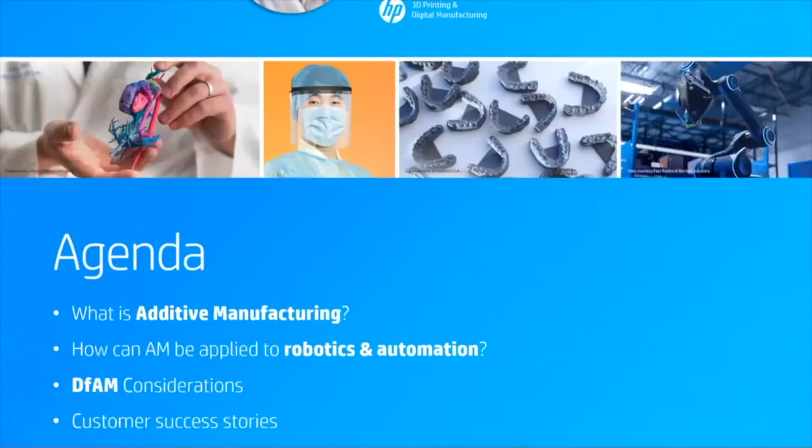We will start off with the introduction of additive manufacturing: how it is, what are its advantages, and finally, how can AM be applied to robotics and automation. Specifically, we will also dig deep into HP's technology solution.

Then we will make some considerations about designing for additive, and we will talk about what mistakes to avoid. At the end of the presentation, I will introduce you to some of our customer success stories, and I will actually show you some real-world applications from the demo room.

Also, make sure to submit to us any question, doubt, or curiosity that you might have. We will have a live Q&A session at the end of the presentation where I will try to be as exhaustive as possible. Let's start with today's manufacturing scenario.

When we talk about manufacturing, we can basically group various methods into three big families: subtractive manufacturing, in which material is subtracted or removed, like CNC machining; and formative manufacturing, where there are technologies such as injection molding or extrusion.

And finally, additive, which is a topic that we will dig into today. Basically what happens is the opposite of the first of these three categories. It involves adding material layer by layer.

Before starting, it is important to say upfront that additive manufacturing does not want to replace other technologies outright. What we need to do is think of additive as one of the tools in our toolbox that can actually be really powerful when used properly, working along with other manufacturing methods.

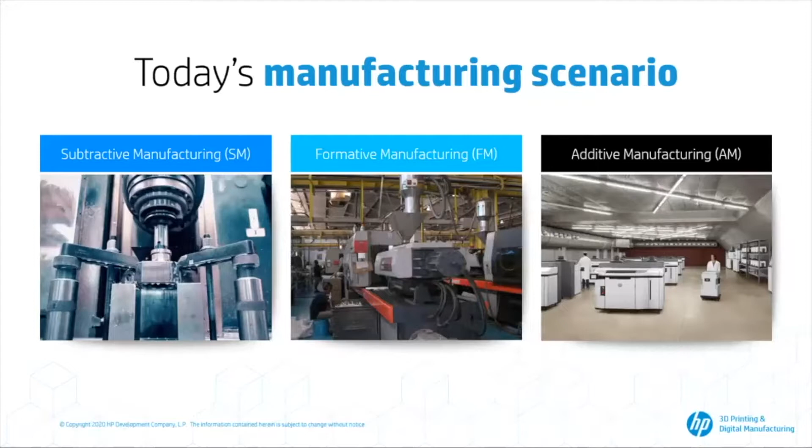So I am talking about different technologies, because if you choose the right process and pair it with the right material for your application, that's when you can actually start realizing some of these advantages.

For example, you can think of speeding up your design cycles compared to most traditional methods, at least, and accelerate both innovation and time to market with your products.

You can also reduce your physical inventory and instead develop a digital inventory, since you can print on demand. This also means that your supply chains will be more robust. Now you can either print directly in-house or rely on a local network of digital manufacturers.

We actually saw the power of this in full effect during the pandemic. Supply chains were struggling to keep up with really critical medical equipment. So we saw a lot of companies with printers stepping up and filling in those gaps, printing face shields, respirators, even nasal test swabs.

Finally, you'll be able to take more control over your capital expenditures, since you can be more strategic about when you actually need to go to a tool solution, like injection molding or CNC, versus simply leveraging additive manufacturing for bridge production or final production.

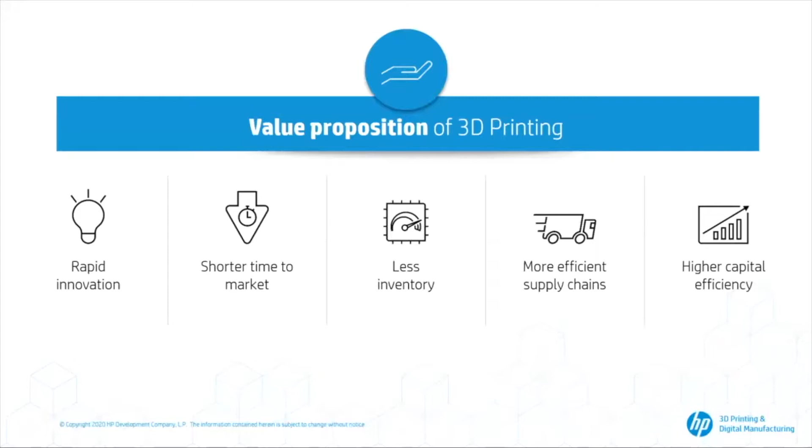As I mentioned before, I have been talking about choosing the right technology, and I actually want to reinforce that concept because it is extremely important to choose the best match between what 3D printing can offer and every company's needs. Obviously, from HP, we provide one specific solution.

So, for example, if you are mainly looking at just a few prototypes here and there that do not need that much quality finishing, or that have a kind of wide margin of error, then maybe a smaller machine like an FDM machine might work better for you.

But if you are looking at final parts or components that you will use consistently, if you need high quality and precision, maybe buying an FDM could actually slow you down when you compare yourself to other competitors in the field that are instead investing in different technologies like HP's Multi Jet Fusion.

But how does the spectrum reduce? Objectively, when you choose a technology, there are three main things to be taken into account.

Your product's capabilities. So for example, let's say that you need a very large part, like a large jigs and fixture or a large end-of-arm tooling. Not all technologies obviously have that capacity, and so the technology options reduce.

Same with very high dimensional accuracy. For example, for a very small needle bearing cage where the margin of error must be minimum, obviously not all technologies will be up to the task.

Again, materials come into play, as I mentioned before. The other two things to be taken into account here are material price, which is pretty self-intuitive, and also material nature. If you produce parts that need to go through specific regulation tests, or need to work in very high temperature environments, obviously not all technologies will match the material that you need and will work for you.

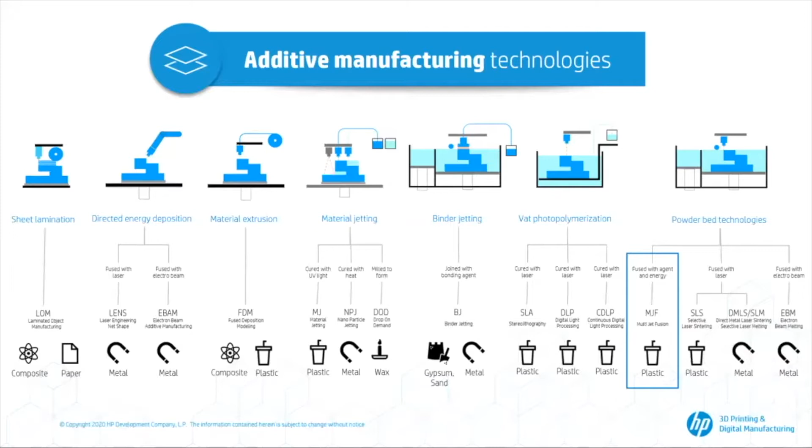Anyways, among powder bed technologies, HP's Multi Jet Fusion stands out. To make an actual comparison, not only with traditional methods like injection molding or CNC, but also with other 3D printing technologies on the market right now, let's have a look at this slide.

First of all, when compared to traditional manufacturing methods, additive manufacturing from HP 3D printing actually allows more customization. You can customize your components in a very economically viable way, with new and complex designs and flexibility, without the limitations of a mold. You can say yes to what you couldn't with traditional manufacturing methods, also thanks to all the software providers that there are.

And then costs and time savings. You can cut on the molds and tools that might be too expensive to produce, and the turnaround times are reduced as well, since any design change can be done in almost a click, and the new edited batch of parts can be good to go in days or weeks, instead of weeks or months that it would take for CNC or injection molding.

When talking about other 3D printing technologies on the market instead, HP stands out in terms of durability, for example. With MJF, you can have part strength both on the XY surface and also almost as strong in the Z axis, which enables a lot of design possibilities that will not compromise the strength of the part.

Talking about strength, parts are strong and can be tested in millions of cycles, and they are ready for production environments.

Sustainability, not only in terms of material waste, which is actually a feature of additive in general, but specifically HP's material portfolio has a 70 to 90% rate of material recyclability.

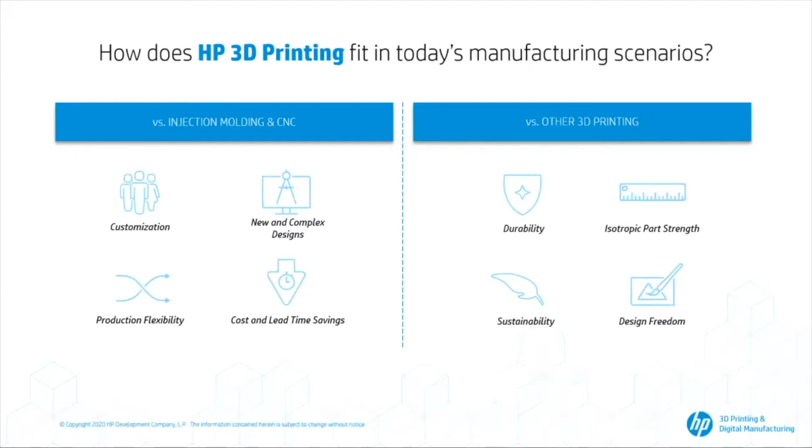To understand that better, let's have a look at this video.

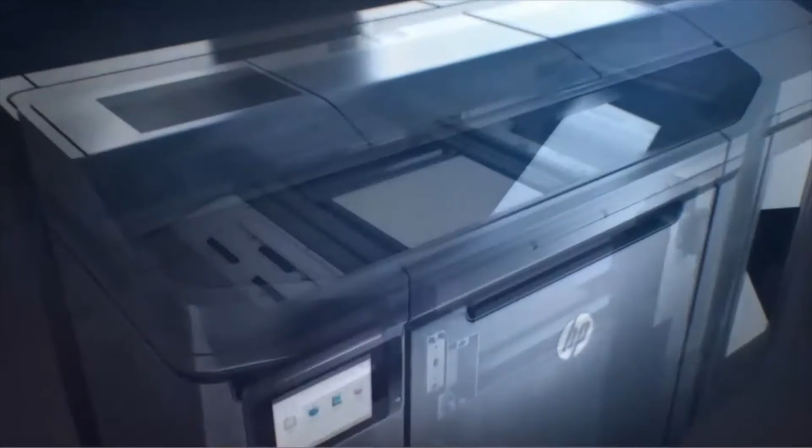So HP Multi Jet Fusion is a powder bed technology, as I already said, which means that what happens is that we spread thin layers of powdered material, and then some HP inkjet printheads apply liquid agents drop by drop across the bed. Then, when the temperature is raised up to the fusing temperature by infrared lamps that apply energy, only certain portions of the powder actually fuse to create the desired shape.

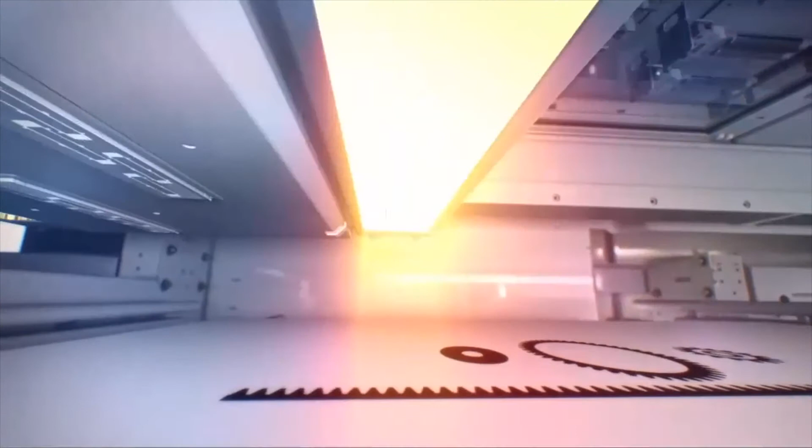And this whole time, sensors and thermal cameras monitor the temperatures to ensure that the process is operating as expected. And once a layer is complete, the platform lowers and the process repeats until the print job is complete.

So the key of this process is in the liquid agents: the fusing agent, which attracts the heat, and the detailing agent, that is water-based and instead deflects it, evaporating for the most part in the process. It's very similar to 2D printing because it also leverages the same inkjet technology.

Let's now move on to the next section of the presentation. How can additive manufacturing actually be applied to robotics and automation? Where is the advantage? Let's start by looking a little bit at the market.

What are the mega trends that are impacting robotics and automation right now? Over the last several years, we've been seeing a number of them across the robotics and automation industry. For example, a huge growth in robotics as more and more companies look to automate their processes and minimize simple, repetitive manual tasks.

All of this while also bridging labor gaps and reducing cost. With that growth, we're seeing more of a demand for not just the same old solutions, but safer solutions, more sustainable options, and also more flexibility in production lines: the ability to deal with higher variation, smaller batches, faster changeover times. If we stop and think about all of these trends, we see that they all go hand in hand with the benefits AM can provide when used efficiently.

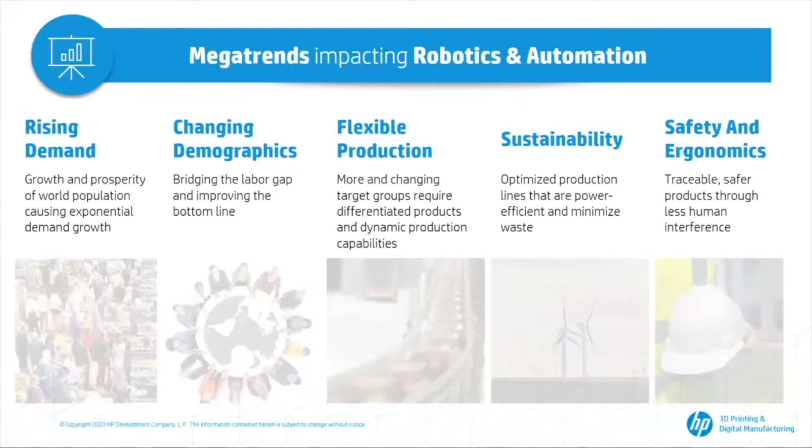So we can see that industry is catching on, and as a result, we are seeing rapid adoption of additive manufacturing for a wide range of industrial applications. For example, mechanical components such as electrical housings, bearing cages, gears, pulleys, jigs and fixtures, inserts, brackets, masks, etc., all of the air conditioning applications, then pipes, tubes, and fluid systems, which also includes pumps and valves, turbines, irrigation systems.

And finally, a topic that we are going to deep dive into today, which is end-of-arm toolings - end effectors, actuators, gripper adapters, sensor housings.

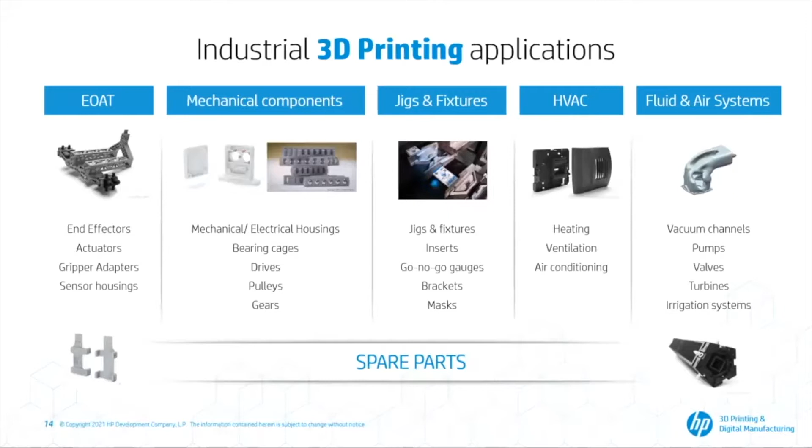When you first think about 3D printing, it is pretty common to think of prototyping, and that is actually a great place to start. But in reality, the technology has advanced to a point where we can now print very robust, reliable end-use parts. But how do you get started with additive, especially if it's the first time you approach the technology? It's very relevant to look into this question.

How do I start designing parts for additive manufacturing? The answer in part depends on where you are in your design cycle. The earlier on, the easier it will be to take full advantage of the technology, and the bigger the benefits in terms of parts performance, cost, and time to market.

As you can see in this graph, moving back on the timeline that goes from defining a new product to introducing it in the market and providing service and support around it, the opportunity for additive manufacturing is bigger going backwards. So let's analyze this, moving from the latest stage of the development cycle to the first, from end to start, and see what happens when introducing 3D printing in your facility.

So we are here at the manufacturing analysis stage. Let's keep in mind that even if you have a part design that's fairly set with little room for change, there are still potential benefits in terms of time, weight, and cost savings. For example, if we're moving from a machined part to a 3D printed part, one option is to lightweight parts. With subtractive technologies, often the goal is to reduce operations to minimize part cost, but that also leads to the heaviest part.

But with additive technologies, you want to minimize material used to both minimize cost and weight - they go hand in hand. Here are some ways you could approach that: hollowing the parts, creating honeycomb lattice structures, depending on the part and the structural integrity required, or you can try to optimize the topology of the part, finding the best distribution of material given an optimization goal and a set of constraints.

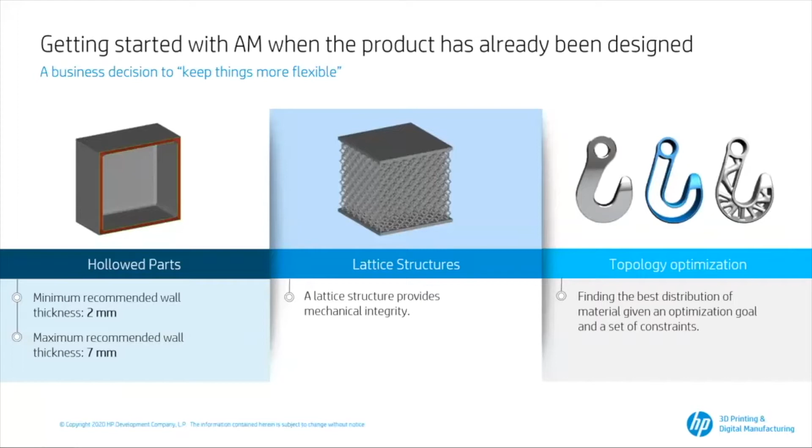Again, as I said before, this happens when you don't have a lot of wiggle room, or you don't have the experience to go through the process to ideate an intricate design that you could achieve from 3D printing. Let's look at an example, specifically an example of lightweighting.

These large format printers use several machined aluminum and steel components. We started investigating how to replace these components with 3D printed versions. What you can see here is the design progression for one of these components. What started as a machined block ended up as a topology optimized structure that obtained a 50% cost reduction, a 93% weight reduction, and not to mention the huge carbon footprint reduction in production.

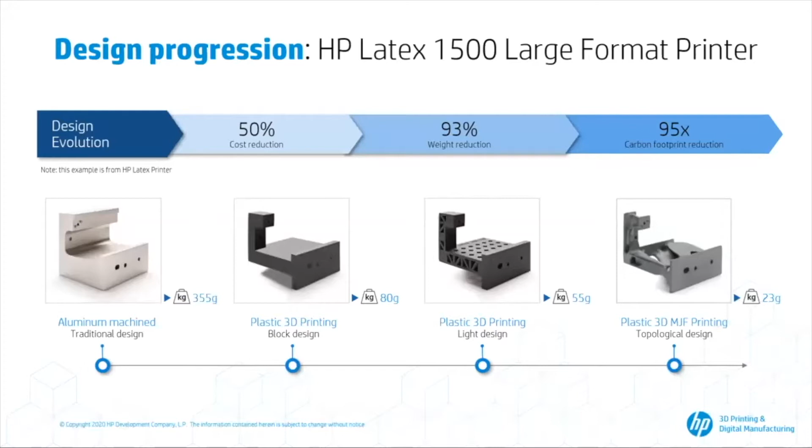But while this is all very impressive, I really want to point out that you don't have to go all the way to this final iteration to unlock most of those benefits. Even by taking just that first step with very minimal design changes, we realize a significant improvement. Even with very limited time or dedicated resources, you can achieve design improvements with additive.

Let's go back to our graph now. What happens if we start a bit earlier, when there's a little more flexibility in your design? Now you can start optimizing for the specific 3D printing process you've selected, and potentially consolidate multiple parts together in a more efficient form.

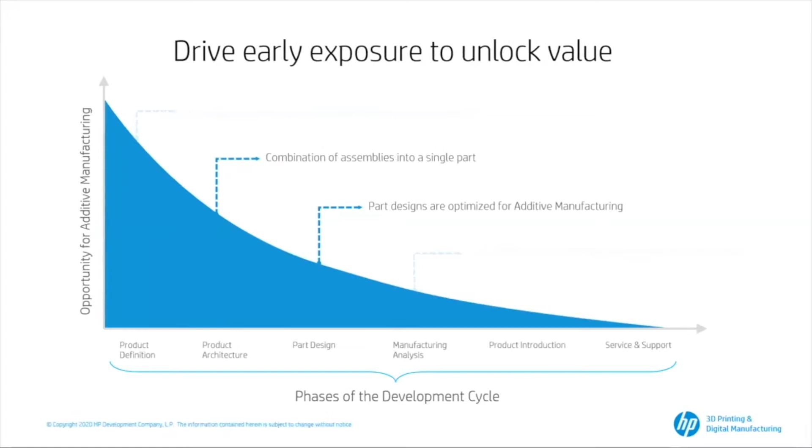Let's look at another example in terms of assembly consolidation. This is a drill extraction shoe used to remove silicone sludges and water used in our laser cutting process to make printhead nozzles. The original was made up of 8 parts, mostly machined. You can immediately see the benefit in consolidating this assembly into just one part. It's not just easier to assemble, but it also eliminates all these joints, reducing any risk of leakage - the number one thing you want to avoid when dealing with fluid systems that need to be air or fluid tight.

To give you some numbers, the cost reduction obtained with this product was 95% compared with the original part. The weight reduction was approximately 90%, both due to topology optimization and material reduction. There was also a lead time reduction, because CNC machining required 3 to 5 days of processing, while HP's Multi Jet Fusion completes the same task in 24 hours.

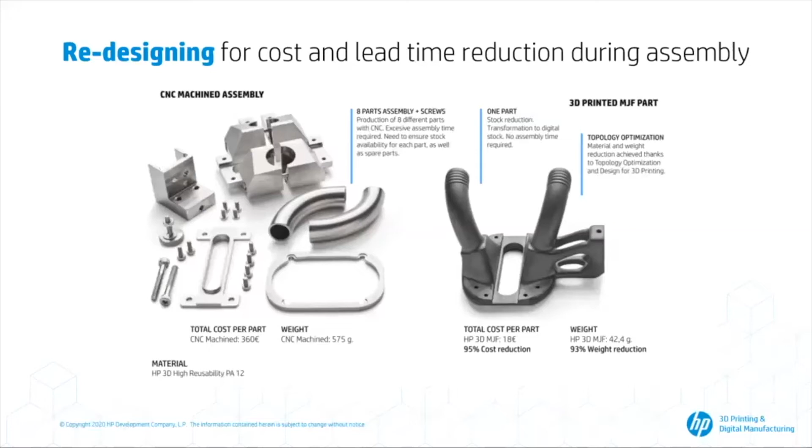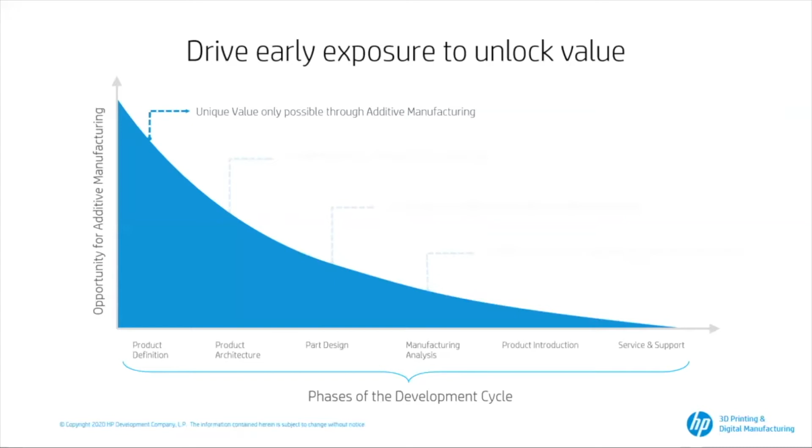Let's go back to our graph and analyze what happens in the best case scenario, when you can start development with additive manufacturing right as you are designing your product. This is how you will really be able to find the best fit for the technology and take the most advantage of it. To demonstrate this, I want to walk you through an example of what that design process could look like.

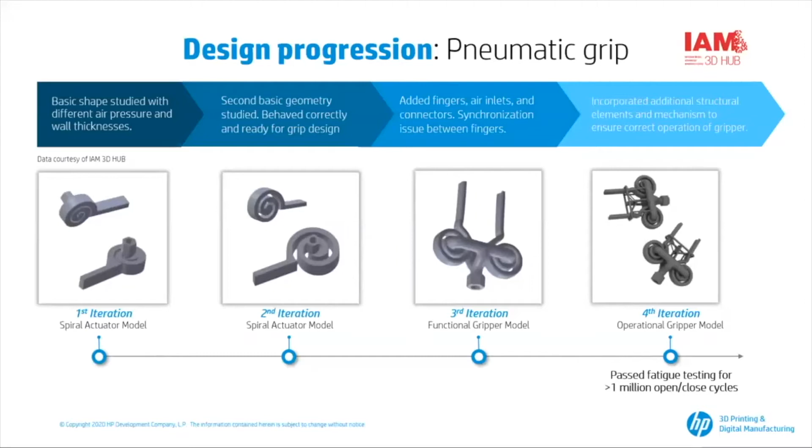Each of these steps can take a matter of days, or even less if you print multiple design options at the same time. So you can go from a concept like theirs, using mathematical growing functions to create a fast and accurate gripper, to finally reaching the solution in the span of just a couple of weeks.

Having talked about how additive works and how it can be beneficial to the world of robotics and automation, it's now relevant to showcase how some customers we work with combine decades of manufacturing design expertise with 3D printing to integrate air channels, camera holders, or sensor brackets into the end-of-arm tooling itself, creating multitask-performing end effectors, reducing cable clustering around the robot arm, or reducing changeover line downtime. So let's look at a couple of customer success stories.

To start, I will play a video from an end-of-arm tool manufactured by IAM 3D Hub that will show you part of HP's 3D printing value proposition for robotics and automation.

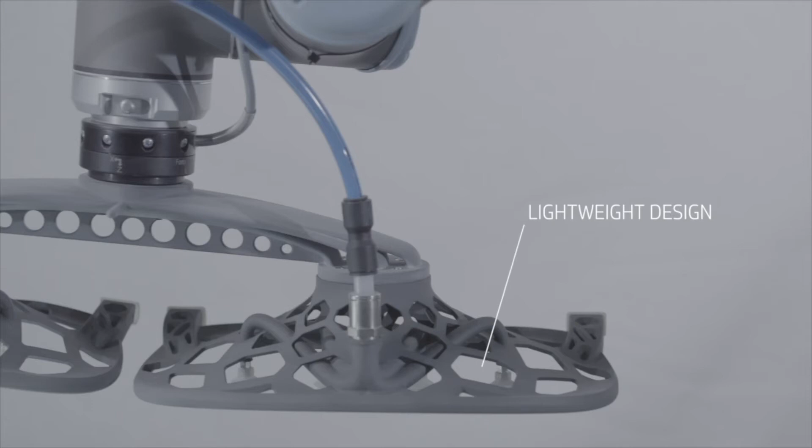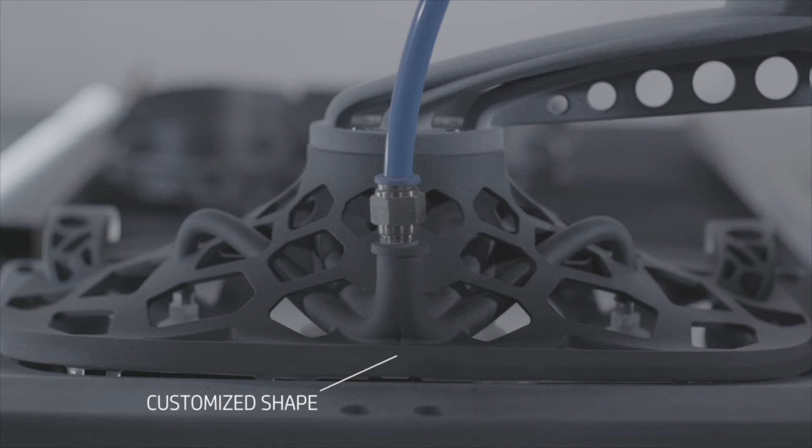As you saw from the video, this is an example that really highlights design freedom. IAM 3D Hub's client, Continental Automotive Spain, is a tier 1 auto supplier who naturally uses a lot of robotic systems for handling parts. Together, they designed this custom shape to fit the part it's picking up, which is also designed to minimize material used while still being very robust.

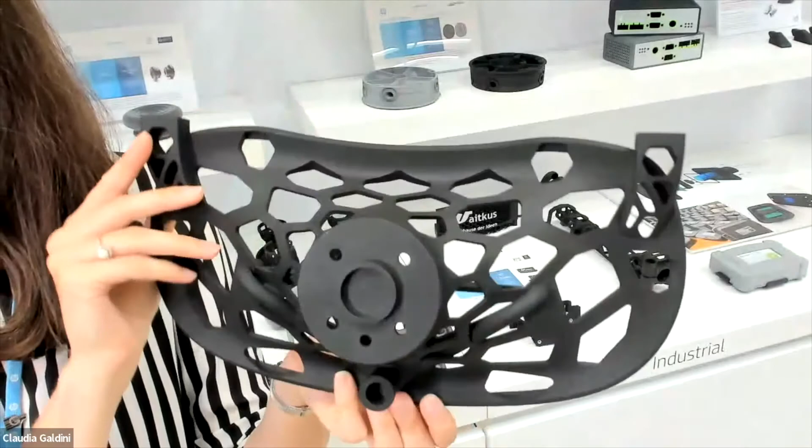Delivery time in this case is only 24 hours, and the end-of-arm tool also has 4 integrated air channels to connect 4 suction cups. All in all, they saw an 87% reduction in weight, which also enabled the customer to use more affordable robots with lower load capacity.

Now that Continental understands how to leverage additive manufacturing, they are completely rethinking their approach to complex workflows. This is also because automotive companies often deal with moving bulky parts very quickly and precisely, which technically leads to an increase in system complexity and cost. Plus, some of their final finishing and assembly operations are performed manually because of the level of complexity involved.

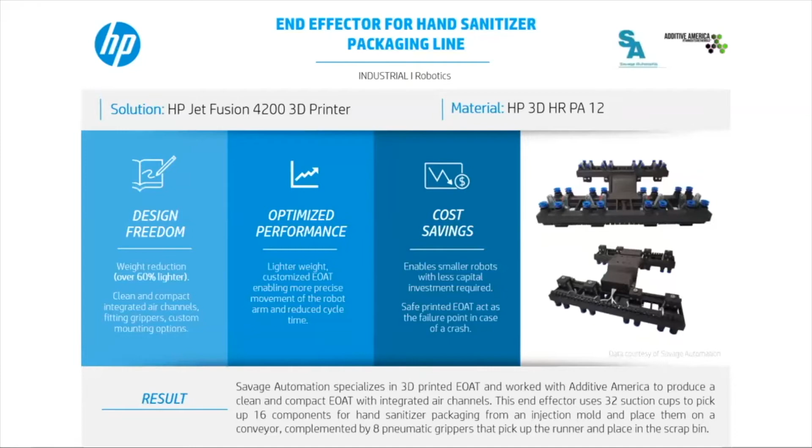Moving on to another application, I want to show you this end-of-arm tool manufactured by Savage Automation. Savage Automation specializes in 3D printed end-of-arm tools, and in this case, for this specific tool, they worked with Additive America and produced this clean and compact design that also has integrated air channels.

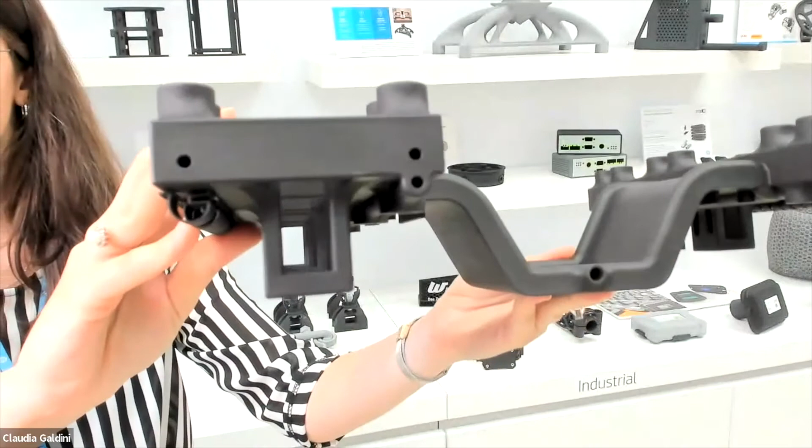Specifically, this end effector uses 32 suction cups to pick up 16 components for a hand sanitizer packaging line. They pick them up from an injection mold and place them on a conveyor, complemented by 8 pneumatic grippers that pick up the runner and place it in the scrap bin. In this case, they managed to obtain a 60% weight reduction.

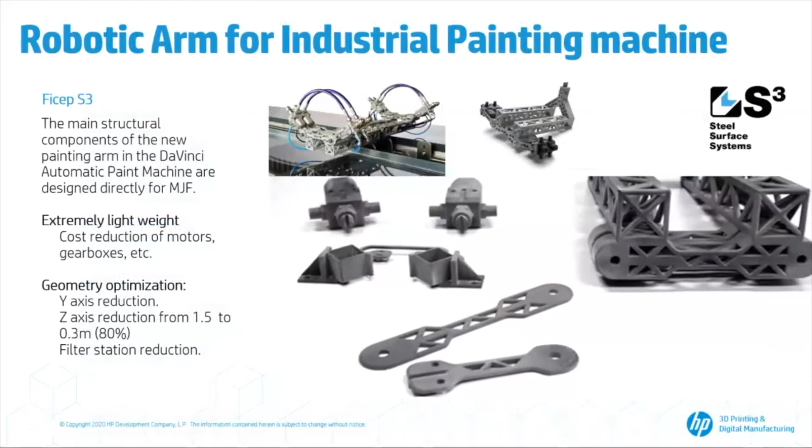The next example I want to show you comes from Ficep S3. The original design for this assembly was machined, and it was almost 5 feet wide. That much weight put a lot of stress on the system, and it also limited the speed and precision that it could move at.

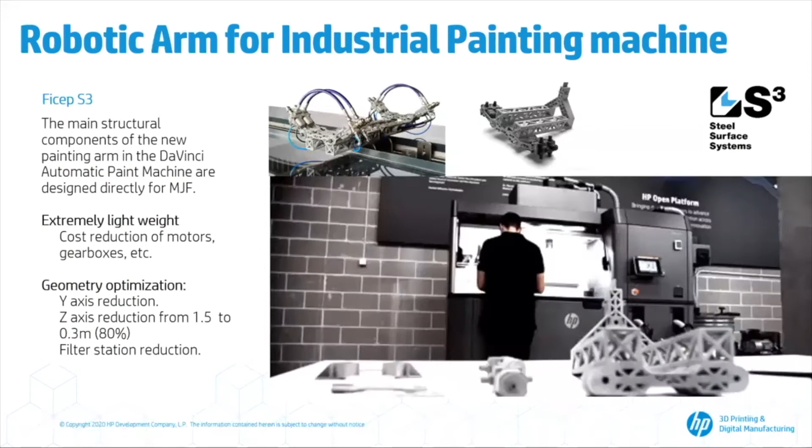So they started to look at redesigning this arm and quickly found that the parts were going to be too complex for machining or even injection molding. If they had gone the route of injection molding, it would have required 11 different components in the mold, which would have been tremendously expensive, and they also would be locked into a design. So they ended up making this painting arm almost entirely out of 3D printed parts, resulting in a huge weight reduction and an 80% size reduction.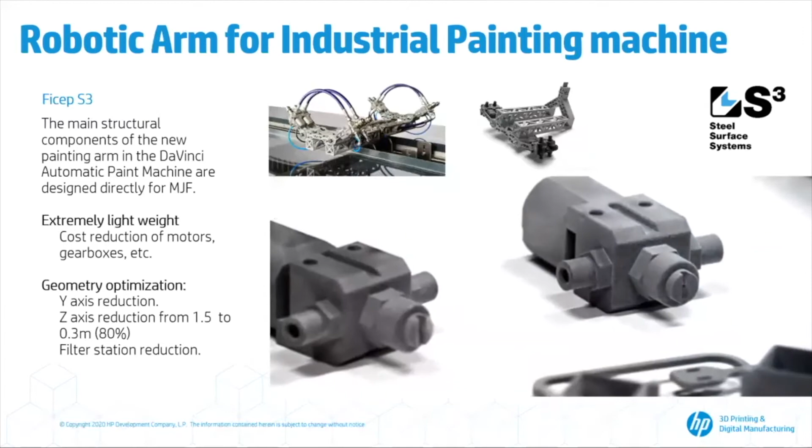Reducing weight unlocks a cascade of benefits, because it also allowed for reducing the size of the motors and gearboxes used to move this tool around.

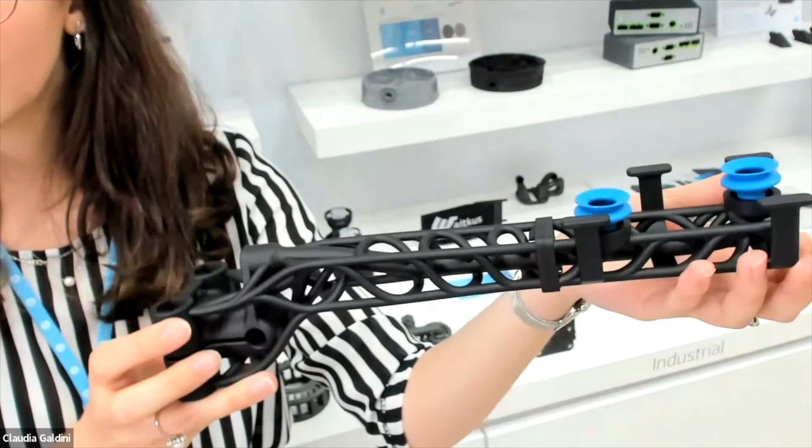The next example comes from one of our service bureaus, Waitkus360°. This application is a vacuum suction cup for the automation industry. It's a great example of design freedom, since this robot arm is made of two different materials, PA11 and PA12 with glass beads. This happened because the front part of the end-of-arm needed to be more flexible, while the strength of PA12 on the back was necessary to create the vacuum end-of-arm tooling previously manufactured in aluminum. By transitioning to 3D printing, Waitkus360° reduced cost and time to part by 50%, while also integrating air channels into the part, eliminating the need for assembly.

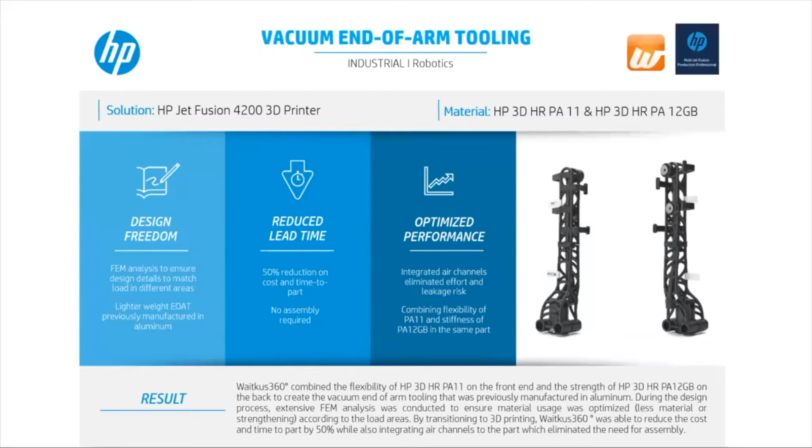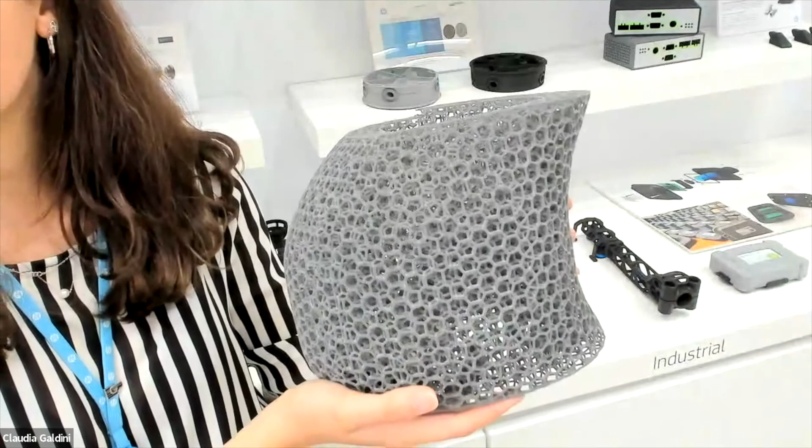But it's not all about end-of-arm tools. As we saw in a previous slide, 3D printing has several applications in the automation space. One example from the jigs and fixtures world for collaborative robots, or cobots, is this protective skin made of TPU by Oechsler. Thanks to the material's flexibility and the lattice structure it's manufactured in, this application acts as a collision buffer, absorbing hits and preserving the robot's structure while drastically lowering the risk of injuries. Other advantages include a speed increase in robot operations since collision forces are highly damped, eliminating the need for additional sensors, and the way it acts as a permeable skin, preventing heat accumulation due to its open structure.

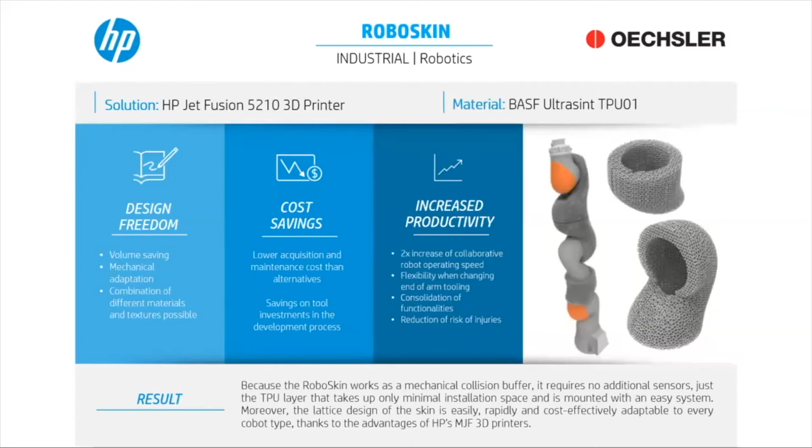For the next application, I'm going to play a video from one of our customers based in Italy, Campetella.

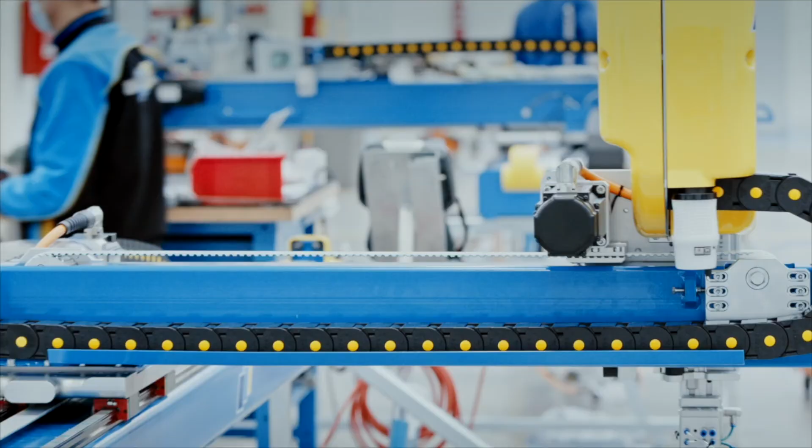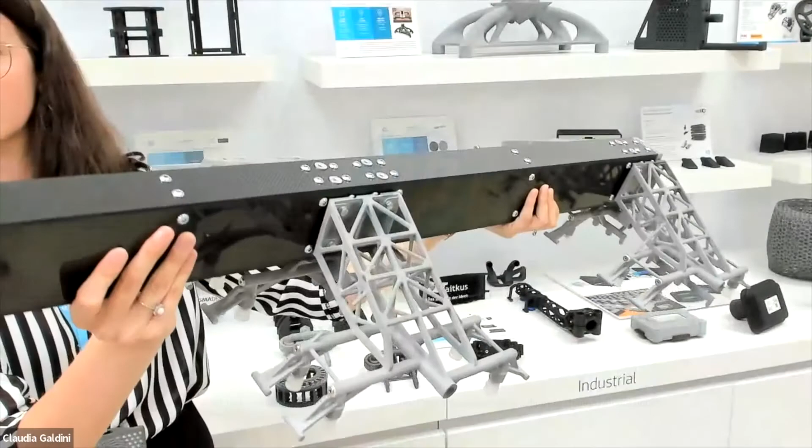In the video we just played, you saw a series of robotic components for labeling machinery. Basically, with additive manufacturing, Campetella managed to join mass production and customization, creating ad hoc solutions for their needs and production line specification. Here is the part we have in our demo room.

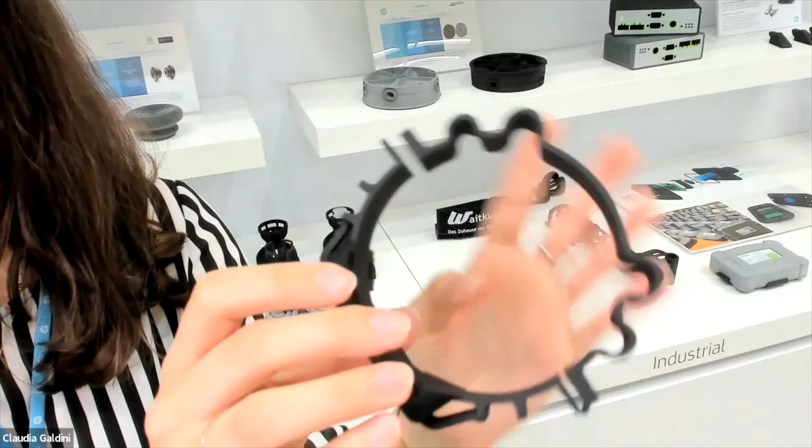This cable holder, designed and manufactured by Waitkus360, can easily be attached to robots using a film hinge. It's made of PA11. Leveraging the ductility properties of PA11 material and the design capabilities of HP Multi Jet Fusion, they were able to create a design that enables better cable management on the operating robot, enabling easier mounting and better robot arm movement.

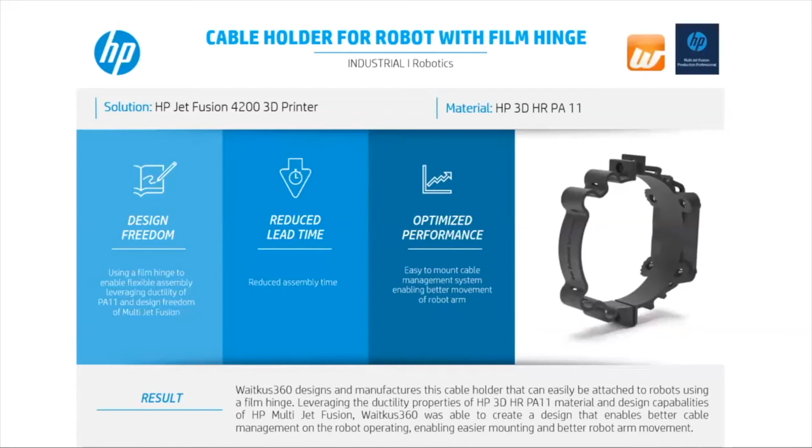Going back to end-of-arm tools, I want to show you an application from ThinkTec 3D. ThinkTec 3D uses HP 3D printing solutions for functional and unique end-of-arm tooling designs optimized for pick and place. By leveraging the design freedom enabled by 3D printing, ThinkTec 3D was able to integrate various functions into the end effector, such as integrated air channels, brackets for cameras, as well as cable management systems for more accurate movements of the robot arm.

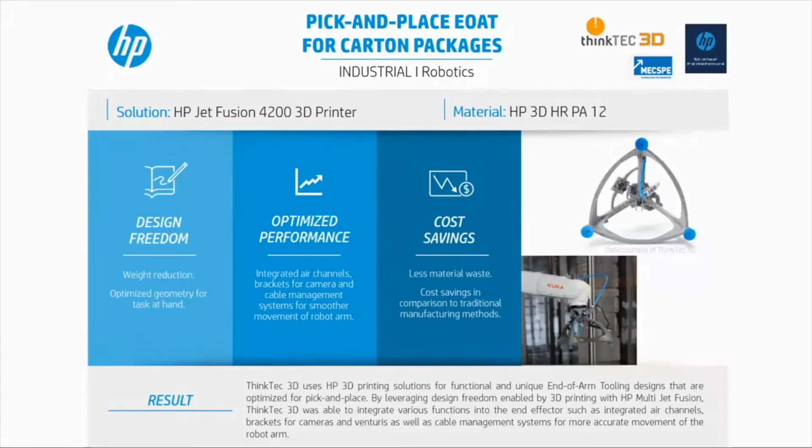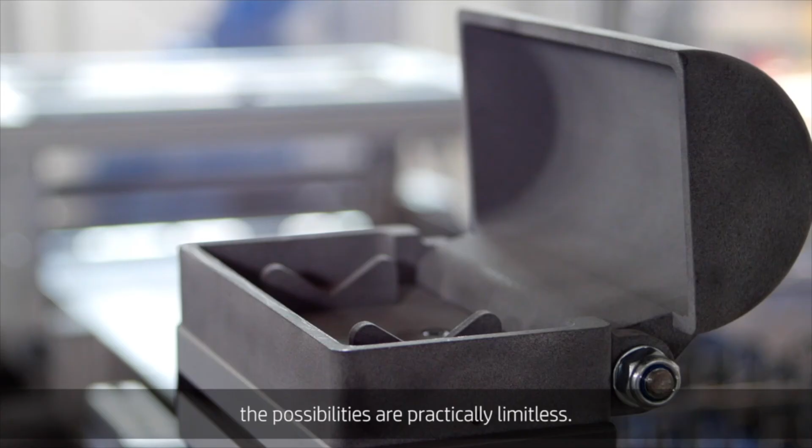We've come to the end of our presentation. In order to conclude, let's take a step back and understand the key takeaways from everything we talked about today.

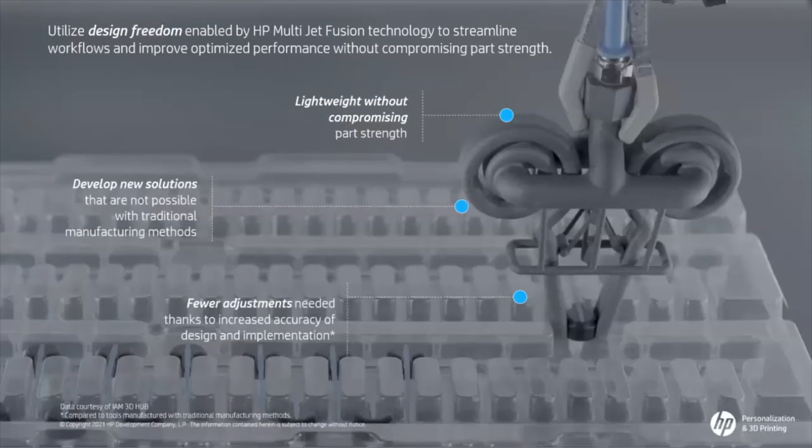3D printing has a very specific value proposition for the robotics and automation industry. You can utilize design freedom enabled by HP's Multi Jet Fusion technology to streamline workflows and improve optimized performance without compromising part strength. Also, end-of-arm tools can be customized to meet end customer specific needs, enabling lower maintenance. These tools can be built to perform multiple operations with specific customized frame shapes to fit the manipulated parts, requiring less adjustment compared to tools manufactured with traditional methods.

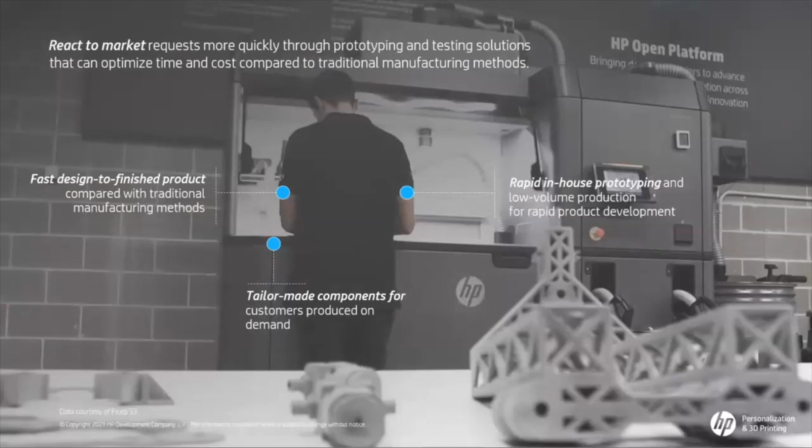Grippers and robotic end effectors can all be custom designed and built for your specific application, and you can also increase speed and accuracy. 3D printing with HP's Multi Jet Fusion technology can greatly reduce the lead time between the design of a component and the actual production of the real part. Within days, our customers can create physical representations of each product rendering, from conceptual models to functional prototypes, and put functional prototypes in the hands of their customers.

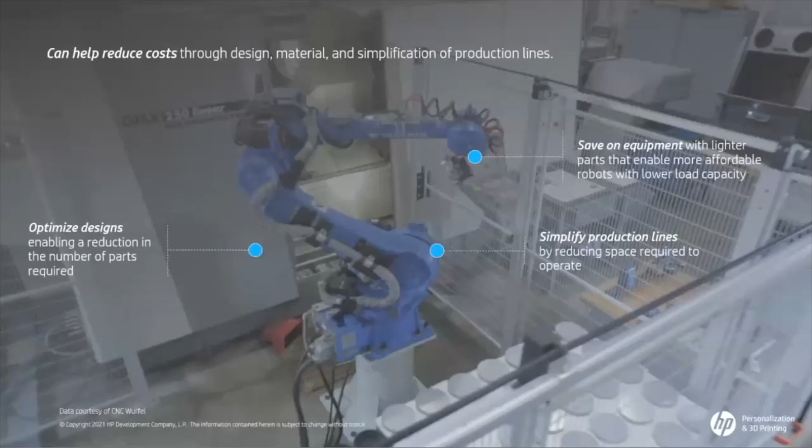Finally, additive manufacturing can help reduce costs through design, material, and simplification of production lines. You can save on equipment, not only molds, but also additional tools and equipment necessary along a traditional manufacturing line, and you can simplify these manufacturing lines by reducing the space required to operate.

So that concludes my presentation. Thank you so much for your attention and for your interest in the benefits of additive manufacturing for the world of robotics and automation.